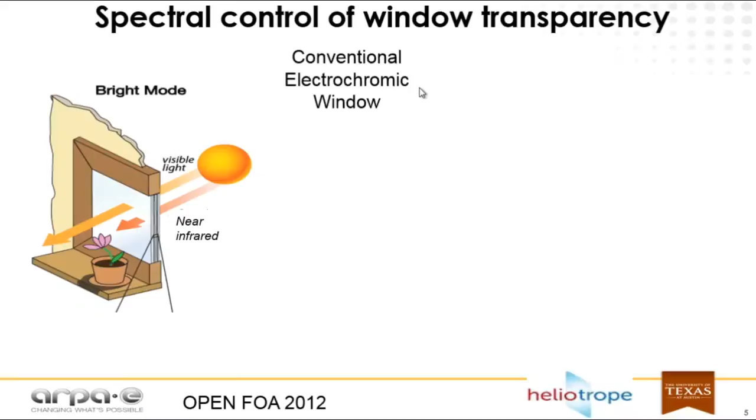So think about where you sit right now. There are photons zipping around this room, each one carrying energy. Those photons are attached to light waves of different colors and frequencies. And these photons are all around us. And the idea of detecting, harvesting, converting them is an enabling technology for energy on the planet, because nearly all the external energy that comes to Earth comes in the form of photons, and much of the heat transfer is mediated by photons on Earth.

I've been at ARPA-E now for nearly 3 years, and I've seen a lot of brilliant ideas come in that have to do with optics. And what I want to do is tell you about 5 of them today that are really technologies, and we hope moving to the market. Next slide. So when you have a window, it's normally clear, and that means visible and ultraviolet come in, and so does the heat-bearing near-infrared that you can't see.

Click. Is there a clicker up here? No. Okay. Yes.

So conventional electrochromics have been around for nearly 50 years, and they block all that visible and near-infrared light with a small electric field applied, so that you can have control of the daylighting, whether there's glare, and also what the solar heat gain is. Now, our team from Texas and a small company, Heliotrope, that they've started, is developing a new kind of electrochromic window that uses plasmonics to independently switch those two kinds of light coming in through the window. So they're able to block the near-infrared photons in a third mode while still letting visible light in. One of the exciting things is that this window should be entirely solution processed for low cost.

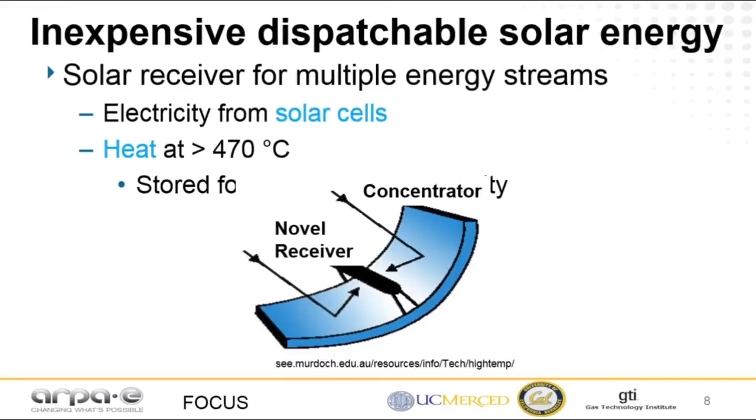Now, one of the problems with solar energy is that the sun disappears at night. Photons just stop coming to us. As a result, while PV is great for daytime electricity, this group and a number of others funded through our FOCUS program, this is the GTI and UCal group, is trying to develop a new kind of solar receiver that goes in a parabolic trough that gets electricity from solar cells and high temperature, high grade, high value heat that's stored for dispatchability later on. So you can store the heat, go through a heat engine, and generate energy afterwards.

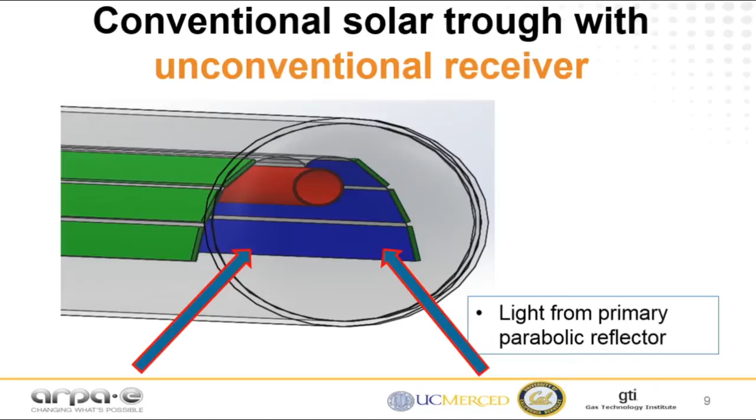At the focus of that parabola is a very unconventional receiver, light from the primary parabolic reflectors coming in there. The PV cell then makes electricity from the visible photons while reflecting all the subgap photons, all the invisible near-infrared photons, to a central location where you heat this fluid, a new kind of thermal fluid that's able to go up to high temperature.

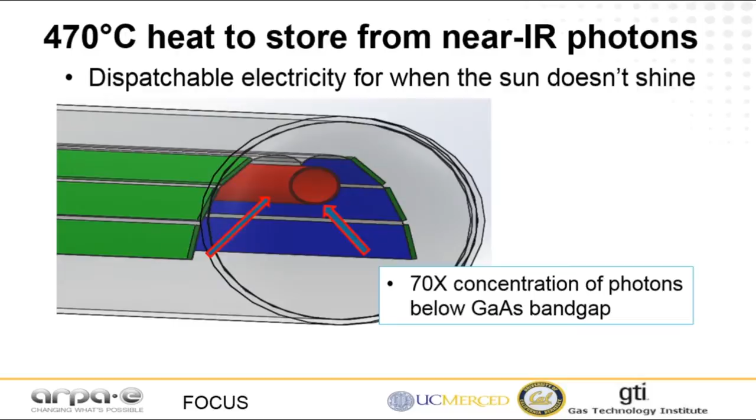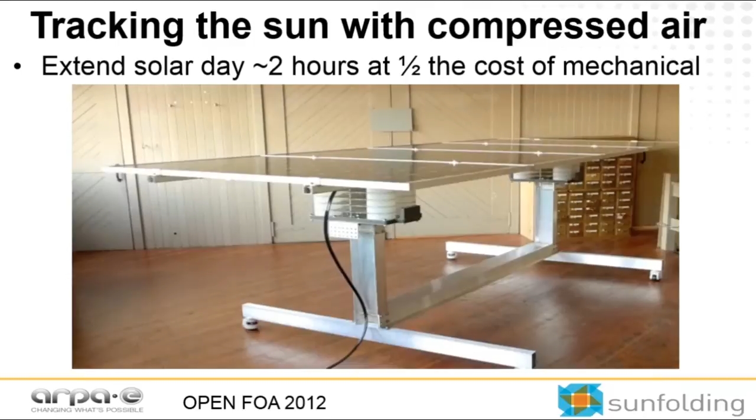Finally, I want to show you technology from Sunfolding, a small company out of Other Lab, and they are trying to take all the costs of mechanical tracking out of the system. At half the cost of mechanical tracking, you can extend the solar day by a couple of hours. And you can follow the sun as it transits through the sky, which is one of the big problems for all kinds of solar energy.

Their first application is in photovoltaics. And you can see what they've got here is a blow-molded bellows. And those wires there are not bringing electricity in, as usually goes to the motors in mechanical trackers, but bringing in compressed air that can turn the solar panel, as I showed.

The total cost reduction of photovoltaic energy should come to somewhere between 2 and 4 cents a kilowatt hour today. As most of you know, you pay about 10 cents for your electricity today. Most photovoltaic systems are down around 11 or 12. So this could really be the difference for utility scale and commercial industrial scale solar energy.

So in summary, in the solar and buildings markets, we think there's a $1 trillion energy market. There's a lot of advanced science going on in photonics and plasmonics and other areas, and we welcome submissions to the Open FOA 2015.

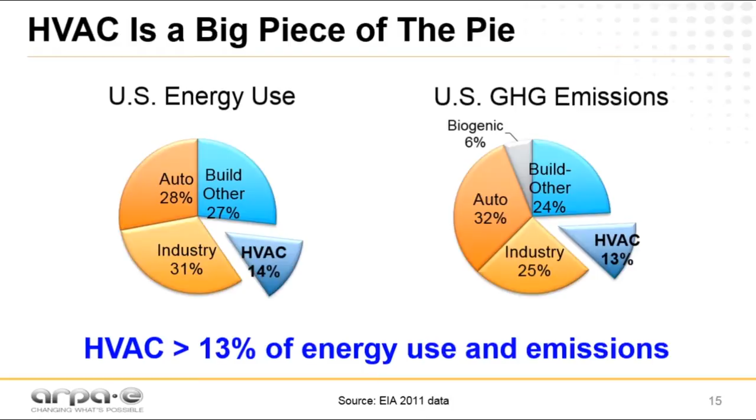So in the US right now, we consume about 13–14% of total energy use just to run air conditioning and heating, with an equal amount of greenhouse gas emissions for this application. Part of this huge energy consumption is really to keep everybody, quote unquote, comfortable. So then you wonder, what's the standard of that? Over the course of decades, a set of standards emerged. So buildings are controlled in a very tight temperature window.

So many of you probably have the experience of buildings running like this: they run at exactly the same temperature in winter versus summer. If we could run buildings slightly hotter in summer and cooler in winter, we can save a lot of energy. This diagram shows a simulation done at Berkeley. If we can expand the window by a little over 2 degrees Celsius, or 4 degrees Fahrenheit, we can save 2% of US heating and cooling energy, about 2 quad.

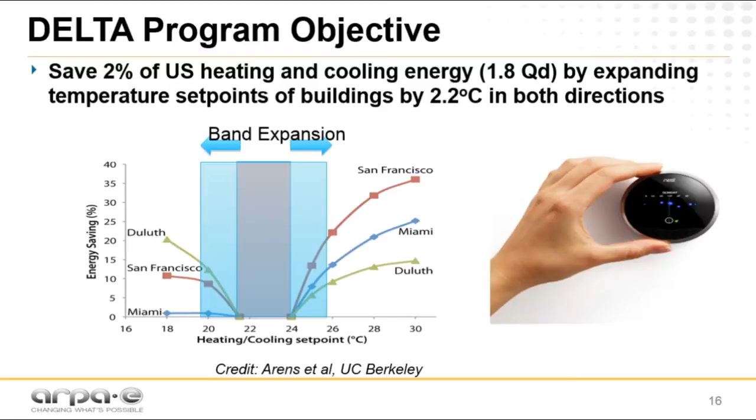Now, of course, the next question you'll ask is that this defeats the point of having air conditioning, because we try to keep everybody comfortable. So what do we do? We need to develop a set of solutions that can compensate for this wide temperature range. Basically, we try to build a thermal envelope around the human body.

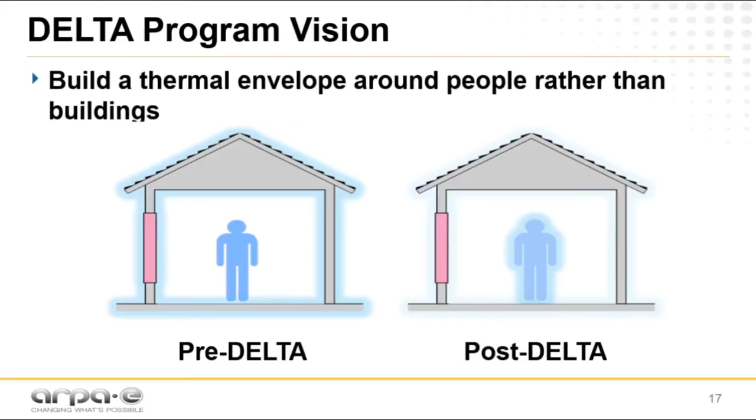How do we do that? We are very technology agnostic when we started out, so we set up the program intentionally to be very broad. If you look at these different categories, they practically contain everything under the sun that can get the job done. We're looking at delivering energy from a distance, to a near range, to what you wear, or any combination of the three.

However the system has to get the job done, meaning we have a set of program metrics you have to meet. You have to save energy, and the economics has to work — I'll touch on that briefly later. Whatever you develop, we need to find a path to the marketplace.

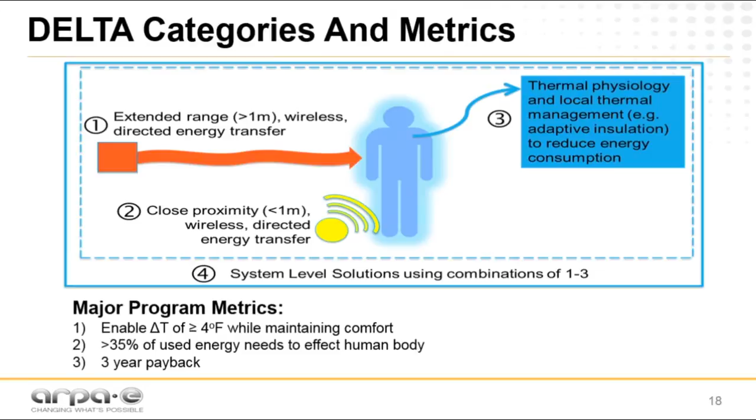With that in mind, we built up this really exciting portfolio of projects we just announced a few weeks ago. One particularly exciting aspect of this program is that we engaged a really diverse set of people to tackle this issue, including many who wouldn't traditionally work on an energy problem — traditional energy experts like building experts and thermal transport experts, but also textile people and experts in studying consumer adoption of products. These are very important aspects of an energy product, and this program gives these people an opportunity to participate.

So we are supporting a wide range of ideas in this program, from delivering heating and cooling from a distance — more along the lines of something you'd install in part of a building — to solutions more suitable for an office environment.

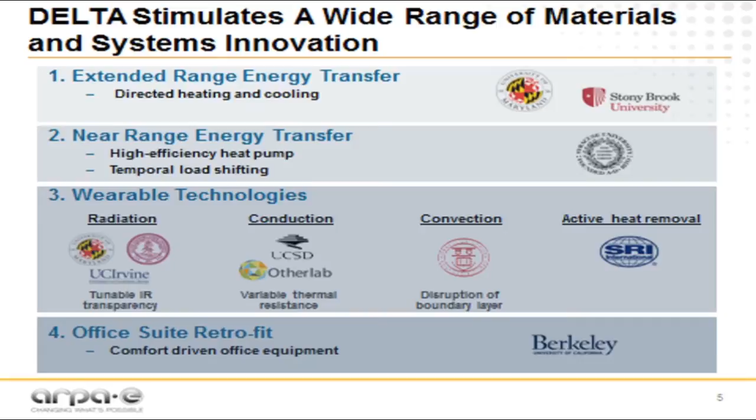I want to highlight this project we're funding at Syracuse. Essentially, what they're trying to do is make a desktop air conditioner, envisioned to be the size of an old PC, that will deliver chilled air to a stationary building occupant without releasing hot exhaust while it's operating.

Now you wonder, that doesn't sound like it's following the second law of thermodynamics. But the secret is really to create a time shift of this heat release. Because the delivery of the thermal energy is so close to the occupant, the actual amount of energy you need is so small. Correspondingly, the amount of waste heat you need to release is also very, very small.

We are supporting a lot of wearable technologies. Some of the more interesting ones actually relate to what Howard touched upon, even though it's for a slightly different reason. We're trying to deliver technologies with tunable insulation values, either by manipulating radiation, conduction, or convection. That rounds up the entire portfolio.

We're really excited about the program, and in the next few years...

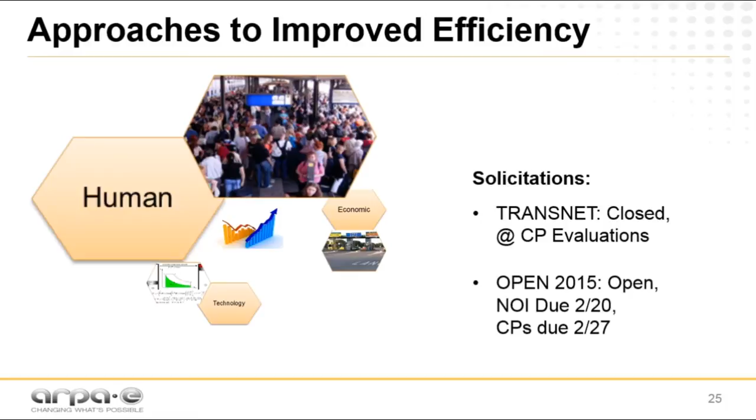Think about it. So we've got approaches to improved efficiency, and I want to emphasize that all of these things really rely on the human factor. The approaches to improved efficiency are human, economic, and technology. I want you to think about ways that you can incorporate the human elements of technology development and deployment into the proposals that come in for Open 2015. And with that, I guess I finished on time. Okay.

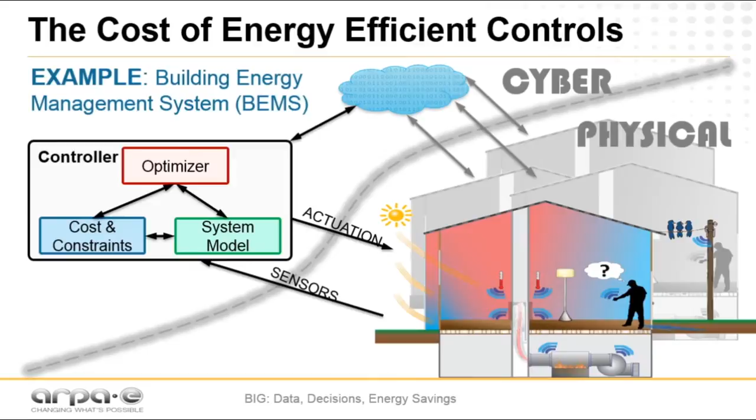The question is, can we use live data streams from maybe thousands of other buildings that already have control systems in them to automate the design and deployment of new control systems?

If we look at cost per square foot in deploying a building energy management system and compare that to building size - 5,000 square feet is a fast food restaurant, 50,000 square feet is the size of a football field, and the Gaylord has 500,000 square feet of meeting space.

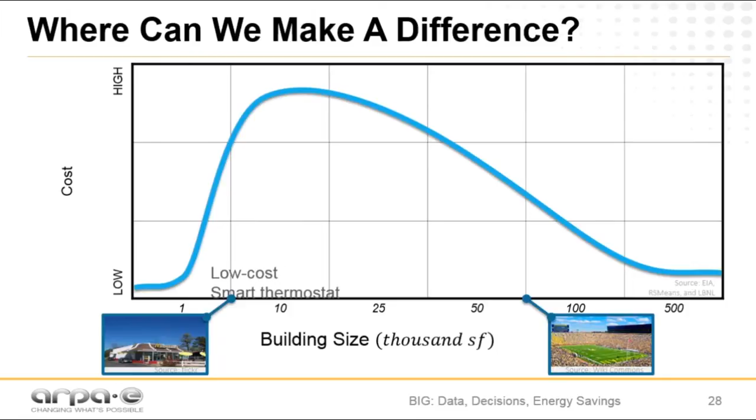The cost curve looks something like this: for really small buildings, we have low-cost programmable or smart thermostats. As buildings get bigger, they get more complex, with multiple zones and pieces of equipment that need to coordinate. To do that, someone is often brought to the site to model the building, design a controller, and tune it on site - a relatively fixed cost that you can spread over a larger area as the building gets bigger.

Once you get to very large buildings, you have a high energy bill but low cost per square foot for deploying a building energy management system, so you can have an energy efficient and economical system.

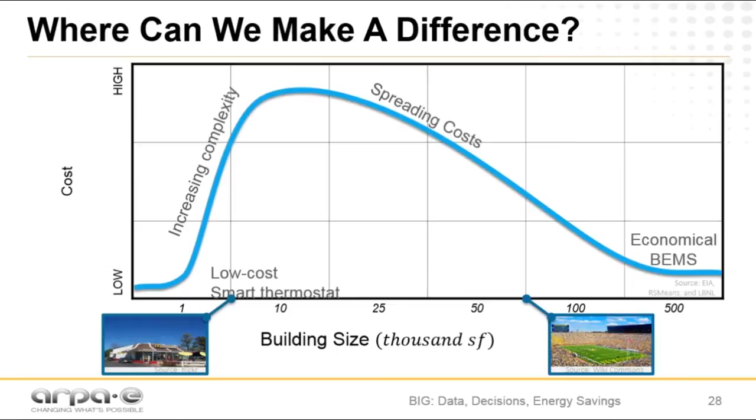So on the market now, we see smart thermostats for homes, and economical building energy management systems for very large buildings. But the question is, can we use data-driven modeling to help drive down the cost for these mid-sized buildings?

Looking at how much energy is used in HVAC in US commercial buildings, we classify buildings from 5 to 50,000 square feet. Public buildings, office, and retail consume the most, followed by other buildings, medical, and food. Those last three have unique aspects to their HVAC systems, so we'll focus on the first three - together almost 1% of US energy consumption.

Only 6% of these buildings have building energy management systems, compared to 17% of buildings over 50,000 square feet. So there's an opportunity to deploy these systems here. If we add in multifamily residential, we're looking at almost 1.5 quad of HVAC, which is $50 billion.

Laboratory research has indicated that between 10 and 60% energy savings are possible.

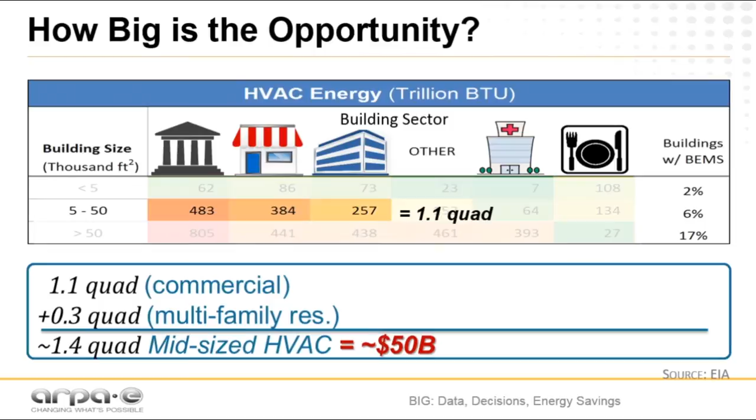So where can ARPA-E work in this space? Algorithms and architecture for spreading the data and computation associated with modeling these complex systems is needed, along with ways to validate these models and controllers. With cutting-edge algorithms, we need validation tools for realistic big data sets - the current approach of spending $1 million per team to generate realistic data sets isn't scalable to the future.

Whenever we're collecting personal information, privacy becomes an issue. There are new approaches to explore for calculating privacy risk and engineering ways to mitigate that, both in the cyber system and the physical system.

And lastly, there are opportunities for new technology to enable new commercialization strategies - can we guarantee payback period using historic data, or even enable new models such as automation as a service?

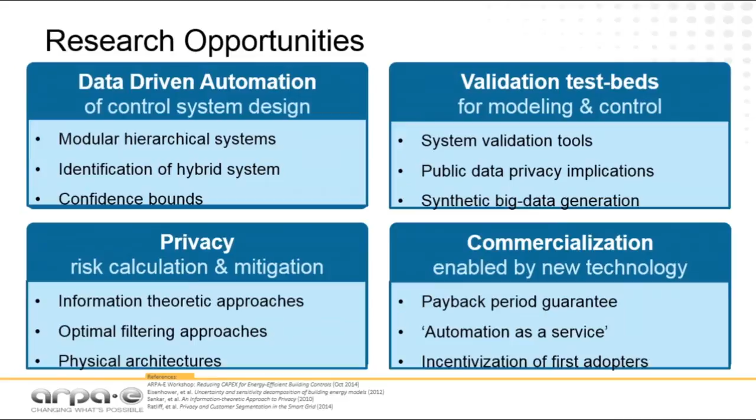These research developments wouldn't just be applicable to buildings. There are 3,000 electric utilities in the US - all very similar, but all a little different. Distributed energy resources are necessitating a need to model these 50-year-old systems. Autonomous cars also need models of their environment for GPS-denied areas.

And those models need to be periodically updated to ensure safety. Non-intrusive electrical load monitoring requires characterizing based off of known models. As Jonathan said, the transportation models can be used for kind of energy-aware routing. If we learn something in one city, can it be applied to the next? And we have 13,000 chemical processing plants in the US. Can we apply some of this technology to that?

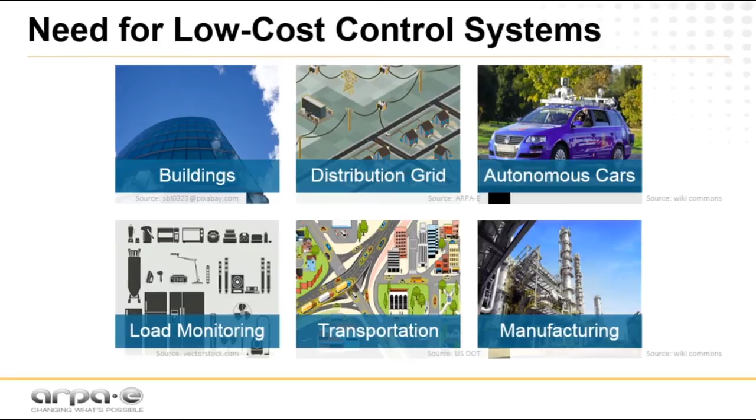So in summary, can we collect big data from distributed mid-sized energy infrastructure and apply that to automate design and deployment of energy-efficient controls? So I'm pretty excited to be working in this area at ARPA-E. I can't do it without your help and your proposals, though.

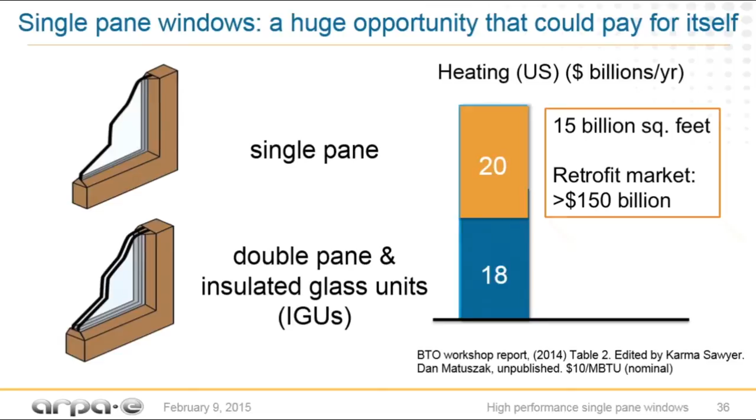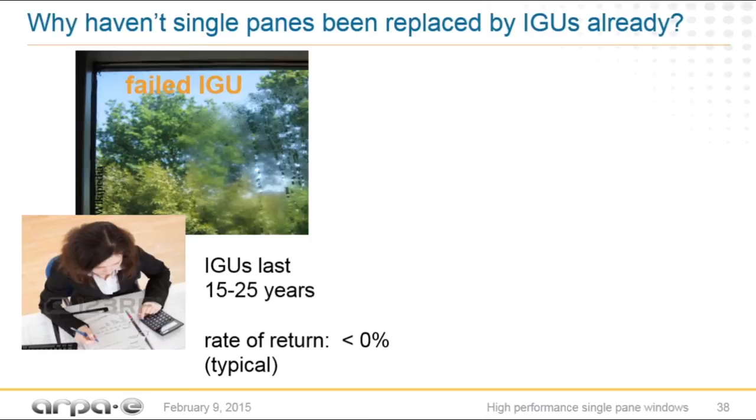The simplest solution would be just to replace single pane windows with modern IGUs, that's insulated glass units. They're the sealed up type. Anyway, they last between 15 and 25 years, depending on which manufacturer, which means that the rate of return just from energy savings is actually less than 0. So you can't make an economic case. However, many building owners do want to upgrade for some of the reasons I'd already mentioned, such as indoor air quality.

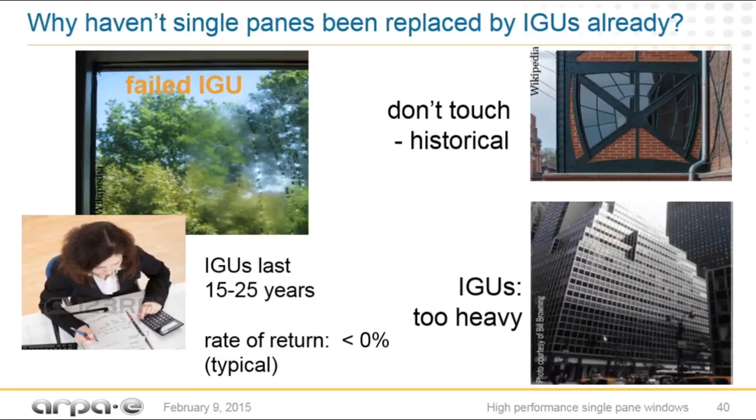But even here, there are some interesting opportunities for new technologies with buildings that cannot be upgraded with IGUs. For example, historical or architecturally significant buildings. And also certain mid-century skyscrapers. Here's a picture of one that was never designed to take all that weight in the glass. There's so much glass weight that if you double it, the building simply is unstable. So you can't use double pane windows or insulated glass units there.

So when ARPA-E considers a new research program, we hold a workshop, and we did have one in November. The workshop record's posted on the web if you're interested. There are a lot of technology options that exist that could be applied to this problem. So I like to sort of show it with spray paint cans, but there's many ways to apply it. That's just kind of a joke.

First of all, super low emissivity, right? Windows have very high 90% emissivities. That's bad. That's inefficient. You'd like to drive that down to about 10%, and there are already products, window film products, manufactured in the US that can do that for you. So there's one piece. I just discovered a Japanese product which actually is a spray paint. You spray on conducting oxide particles, and you achieve the same effect of a nice, low, efficient emissivity.

But that's only part of the picture if you drill down into it. There are other qualities that you need to get a good window. So in addition to the emissivity, it would be very helpful to have a thin layer of super insulation. And people have been trying to do that for many years. Probably the best known technology for that is silica aerogels, which are actually used in skylights today.

Anyway, that's an excellent approach. It has some problems with application and clarity, and so one wants to look at all the options. Another cool approach is to make little silica nanoshells, which can be piled up as an aggregate and also have excellently low thermal conductivity. Still another one, you can use block copolymers to template three-dimensional networks of silica that have

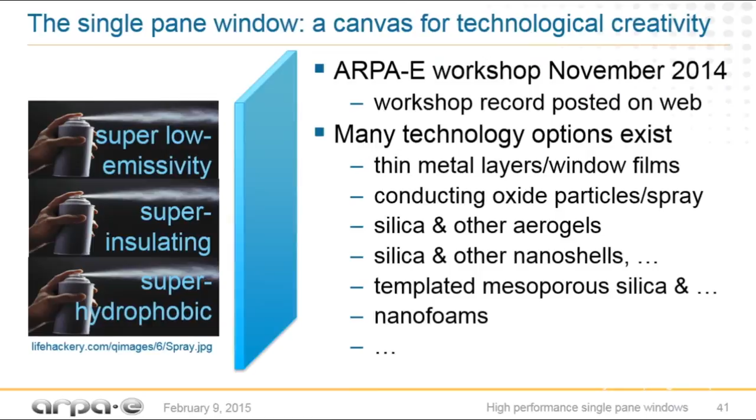many of the good properties of the nanoshells or the aerogels, but it's an orderly lattice. This helps you control transparency in a new way. Still another option, nanofoams. There are many, many options that you can consider applying.

So I'll conclude by saying that we are considering the possibility of offering a research program in this area. I hope you will email me or find me around the meeting if you have suggestions for how we should organize that. And let's remember the goal. In the children's story, you may remember what happened to the ugly duckling. The inefficient single-pane ugly duckling, of course, grew up into the swan of the building envelope. Thank you.

Okay. The technology is working, and so you are welcome, if you haven't already, to text in questions. We have a few here, and I guess I'll turn first to Ping Liu. Ping, do you see lighting playing a part in the goals of Delta? Lighting? Lighting technique, yes. I guess I would interpret that as personal lighting rather than lighting the entire space.

That's certainly outside of, I mean, the focus of Delta is really to look at the sort of ambient lighting and thermal management. Because of the diffusive nature of thermal energy, it's arguably the most difficult technically to do. I mean, obviously, to localize the heating and the cooling is not new. What's new is whether today, with today's material sciences and photonics advances, we have the opportunity to